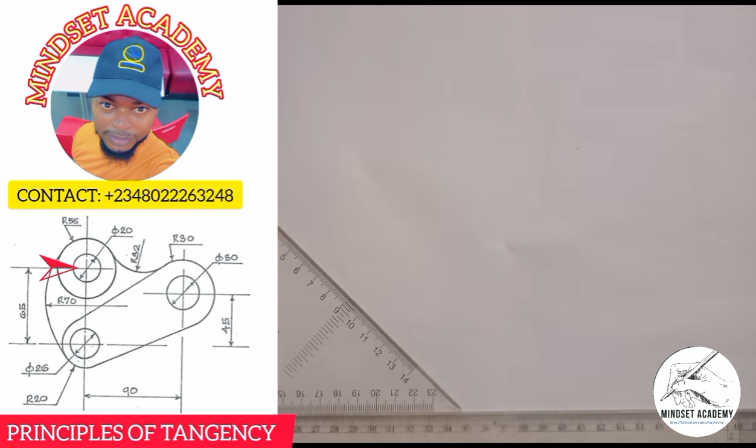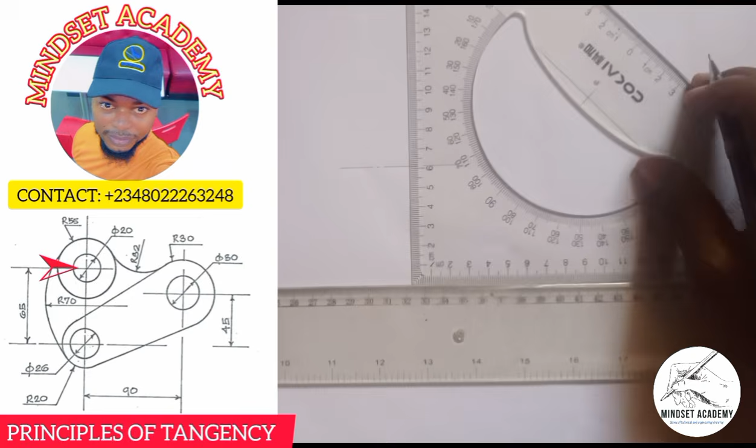So what I'll do here is I'll take my metal rule this way, and I'll just pick any point I like. Let's say I am picking this point, so I'm going to draw the horizontal line using a center line to represent it. Long, short, long, short, long. Can you see that? And I will take another one on that point again. Long, short, long, short, long. Can you see that? So this point here is the point my arrow is pointing to. Let me bring it up a little bit. So this is our target here, right?

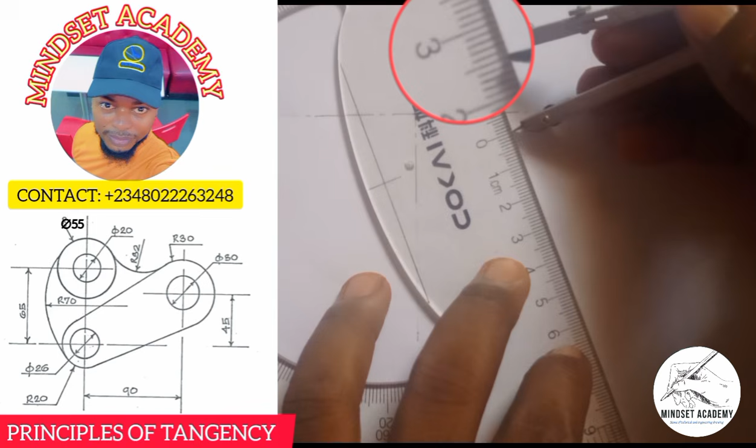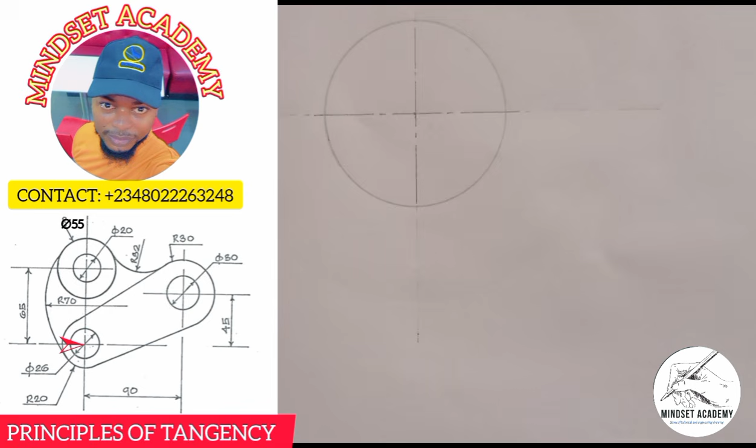Now, the next thing is from this center to the next center, as you can see, is given to be 65, right? So I am going to measure 65 from here, from the center 0 to 65. All right, let me bring down my center lines. So we have short, long, short, long, short, long. So this is the 65 here, right? So that's another center. I'll just do the next thing here. Long, short, long, short, long.

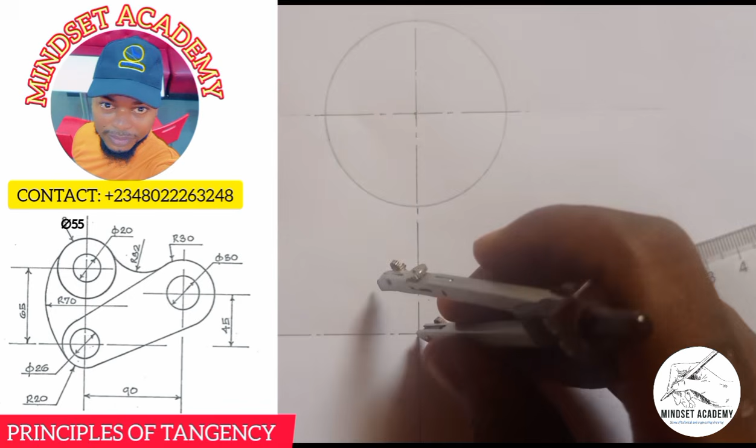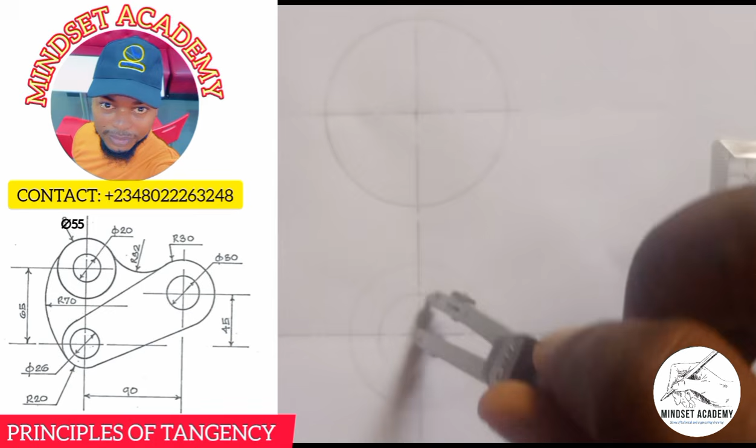Can you see that? And the radius of that circle, let's look at the bigger one outside there. That is 20. So you just draw your faint line first. Radius of 20, from 0 to 2. And when I place it here, I will draw it this way, faint line first, because the circle is not complete. Then the inner one is given to be a diameter of 26. Since it's diameter, use radius, which is 13. And this is 13 here. Can you see that? I'll place it here, but this one I will thicken out. Hope you can see that.

Now, before we proceed, I want to bring out all the centers that I have. There's another center at this point here. To get to that center, from this center here, I have to move a distance of 90. So let me extend this a little bit this way, just faint line first. Then from this center, I am going to measure 90. So from 0 to 9 is 90. Then I'm going to take it up. So this is the 90 with faint line first. Long, short, long, short, long. So this is where the 90 is.

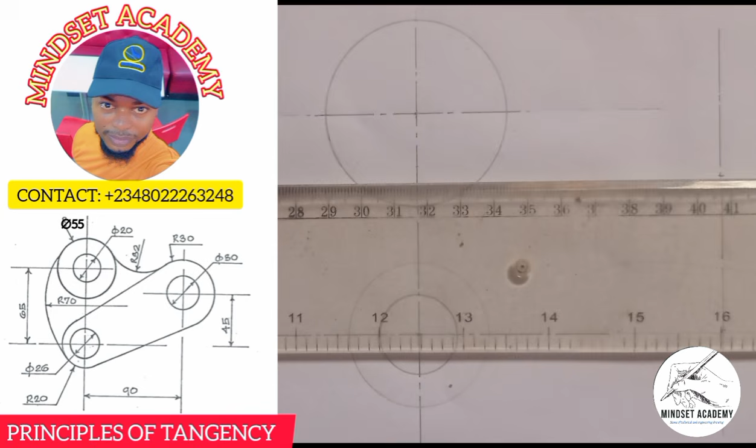Then from this point here, I'll now measure 45, as you can see, to get to that center. So from 0 to 45. And I'll do my center line here. Long, short, long, short, long. Right? And we have two circles there. One of them is radius 30, the outer one. So I'll use radius 30 with faint line first, because the circle is incomplete. So from 0 to 3 is 30, and I'll place it here. Just draw a faint line first, because it is incomplete.

Then the next one, the inner one, is a diameter of 30, so I'll use a radius of 15. So from here I have 15, and I'll place it here. And I have this. So let me make you see it a little bit. Let's come down small. So let's come here.

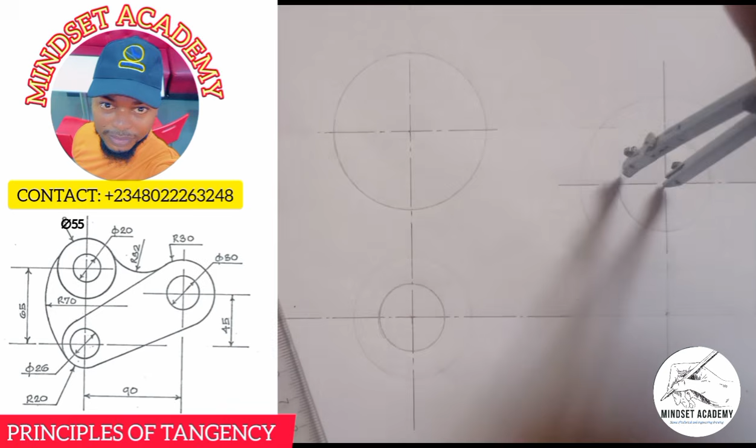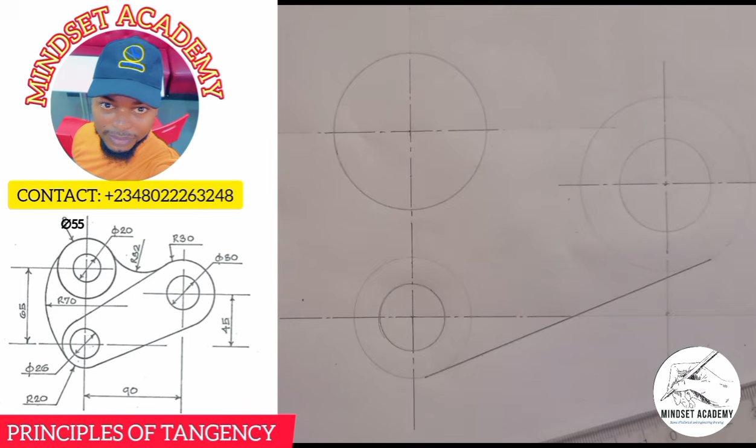So I'm taking this one, right? Then aside that, there's a straight line that is tangential to these two circles. So from here, I draw my straight line that's tangential this way. Can you see that? Then another one tangential from here also to this point. That's a straight line.

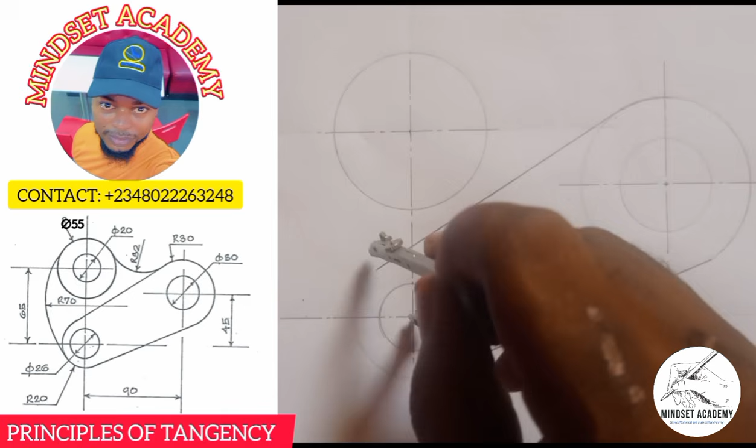Right? Now I can easily thicken here out from this point, from here to this point. Hope you can see that.

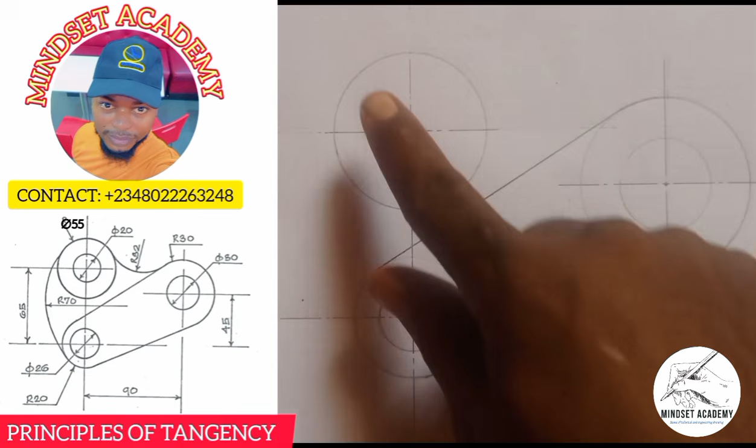Right? Now if you look at this closely, you can see that there's an arc meeting these two here, and these two circles are external to that arc. And whenever they're external, you're going to add. Or we can say whenever it is going in, you add, and when it's coming out, you subtract. So since it's going in, I am going to what?

I'm going to add. So in adding, it will be the radius of this circle plus the radius of that arc. The radius of that circle is given to be 27.5, plus the radius of that arc, which is 32. 27.5 plus 32, right? And that will give us 59.5.

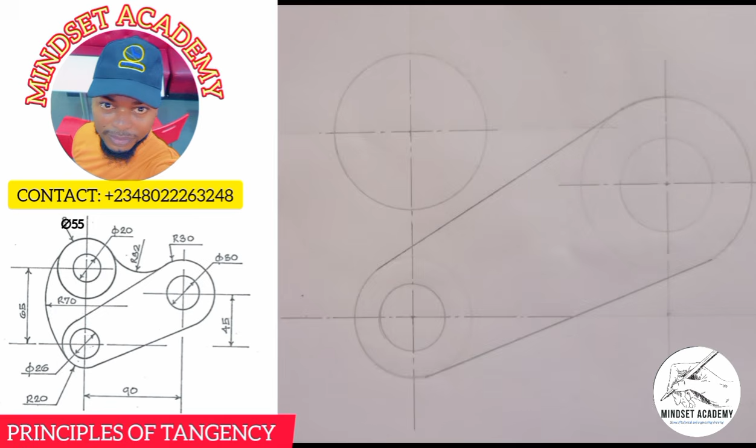So I'll take my instrument and I'll measure 59.5. So from 0, 59.5, almost 60. And I'll place it at this center since I'm considering this circle first. Let's bring it down so you have a better insight. And I'm going to strike an arc.

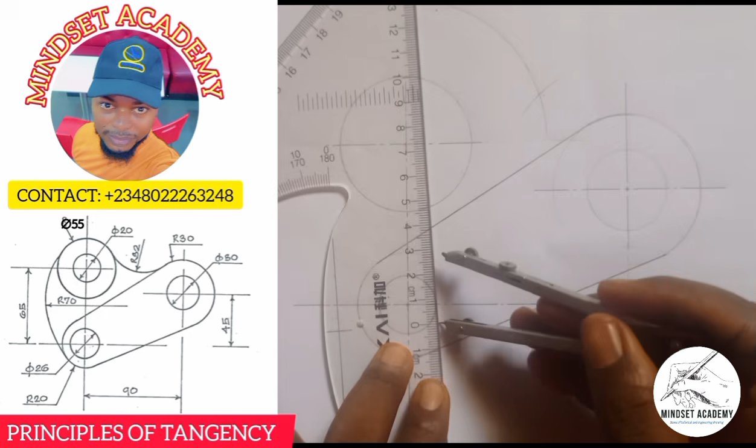Can you see that? Then the other one, the radius of this bigger circle here is going to be 30. So 30 plus 32, the radius of this arc, gives us 62. Sorry for that. 62. So from 0, this is 62 here. Right? So I'll place it here. I'll strike an arc. So this is what I'm looking for at this point here.

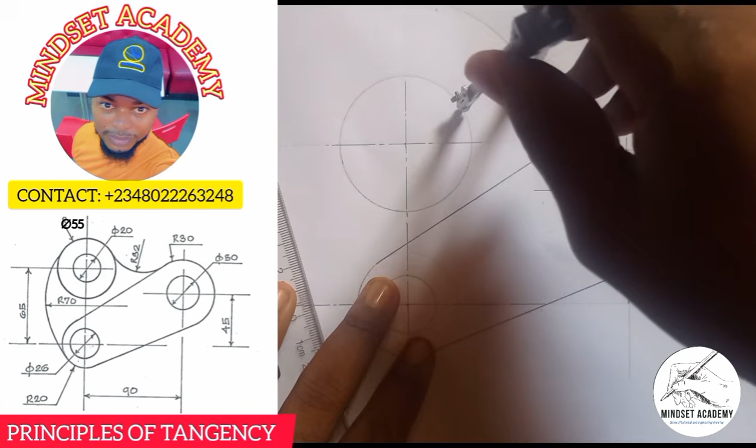So when I place it at this point, then I'll come here, where I'm going to place it. And sometimes you might be drawing this and realize that something looks wrong somewhere. Right? So we need it from here. So we have this way. So it means there's a circle here. Right? Now we'll move forward. So this is the center of the circle.

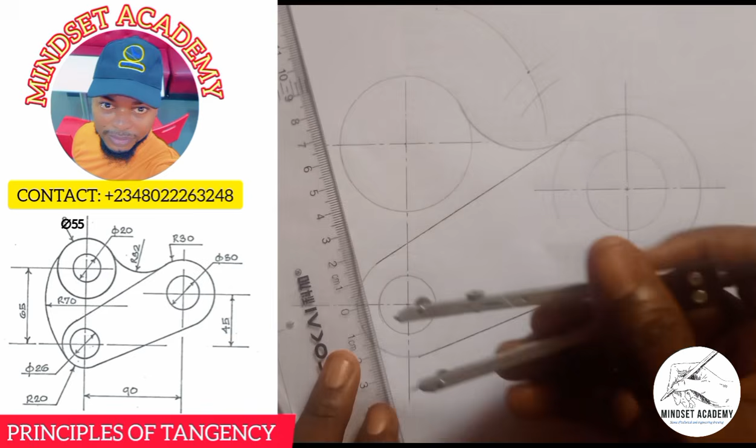Now the next thing that we have is another one that is inside here too, and that has a radius of what? 10, because the diameter is 20. So I'm going to measure 10, from 0 to 1 is 10. Then I'll place it here. Then I'll strike an arc. Hope you can see what I am explaining here.

So once you've done that, there is another arc that is connecting these two. I told you earlier that when the arc is coming out, you are going to subtract, and when it is going in, you add. So this one is coming out. So the arc itself is radius 70, and the radius of this is 27.5, right? Since the diameter is 55.

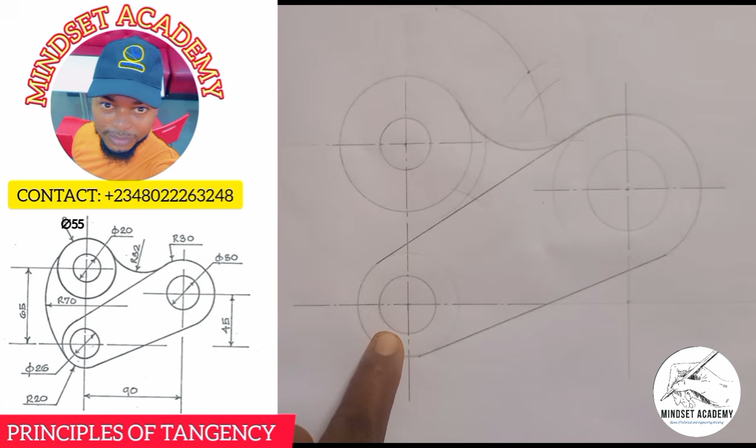So I'll just take my meter rule and I'm going to do 70 minus 27.5. So it's subtraction. The radius of this is given to be 20, and the radius of that bigger arc is 70. So 70 minus 20 will give us what? 50, right? So I'm going to measure 50 on my meter rule this way, from 0 to 5 is 50. Then I'll place it here and I'll strike an arc.

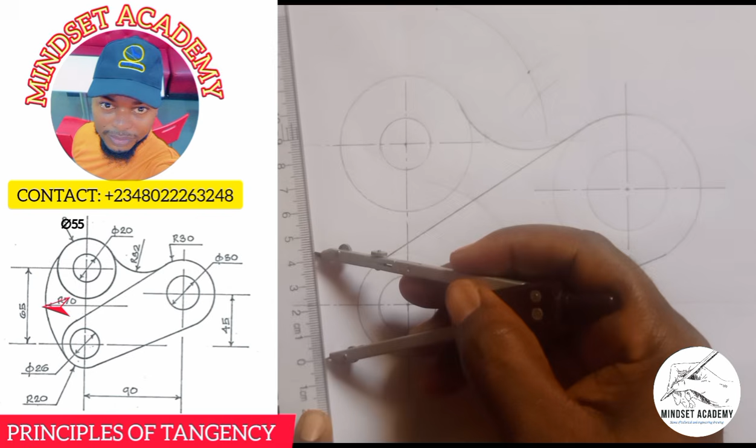While the other one, the radius of 70 minus the radius of this circle here, which is 27.5, will give us what? 42.5. So I'll take my meter rule and I'll measure it. Then I'll place it at this point here. Then I'll strike another arc. So this is where the center of the circle is.

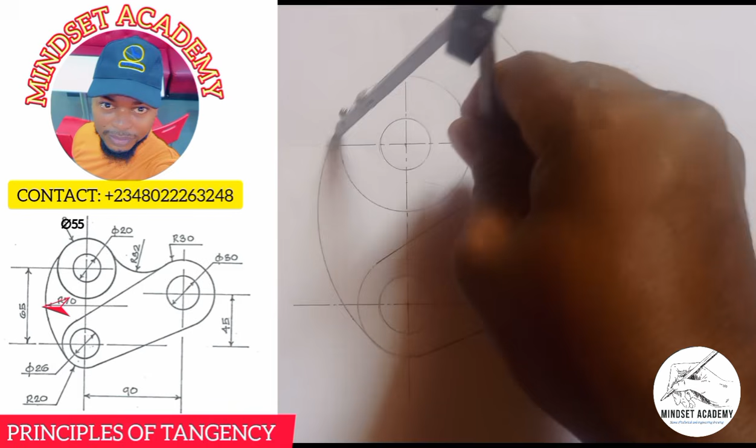So when I place it here, I'll draw an arc there to touch these two. Can you see that? So what is remaining? We have successfully brought out the entire shape that we have here. And the next thing is for us to do the dimensioning. This is very important for you to do your dimensioning.